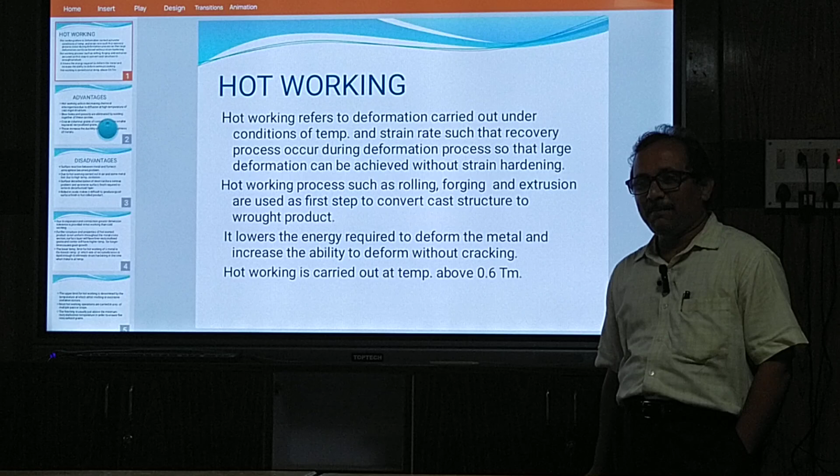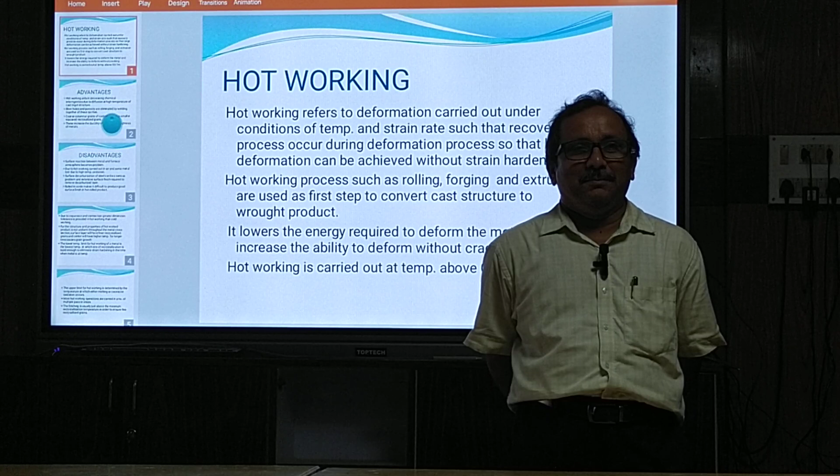Dear students, today we will discuss about your mechanical working subjects. The topic is your hot working and cold working. There are two types of working.

Mechanical working is carried out for different processes. Our mechanical working processes like rolling, forging, extrusion and wire drawing are all classified into two groups. One is hot working, another is cold working. So before going to that, we should know what is hot working and cold working.

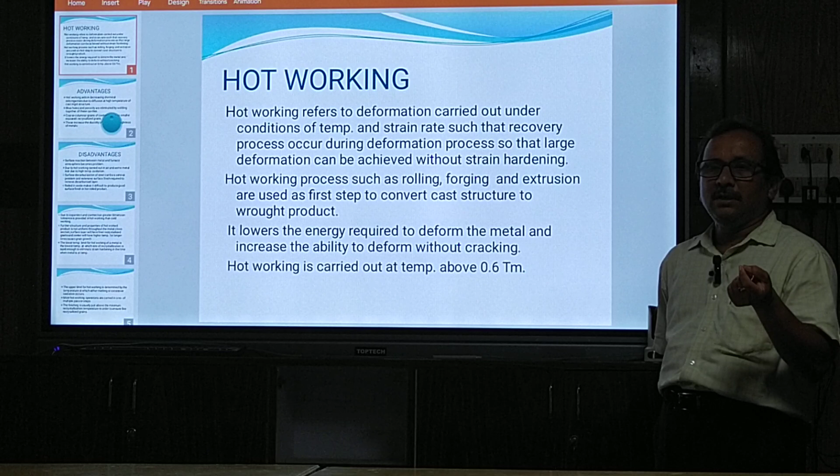There is one temperature that is called recrystallization temperature. If we do the work above the recrystallization temperature, then it is hot working. If it is below the recrystallization temperature, then it is cold working. So before going to the details, first we will go to hot working.

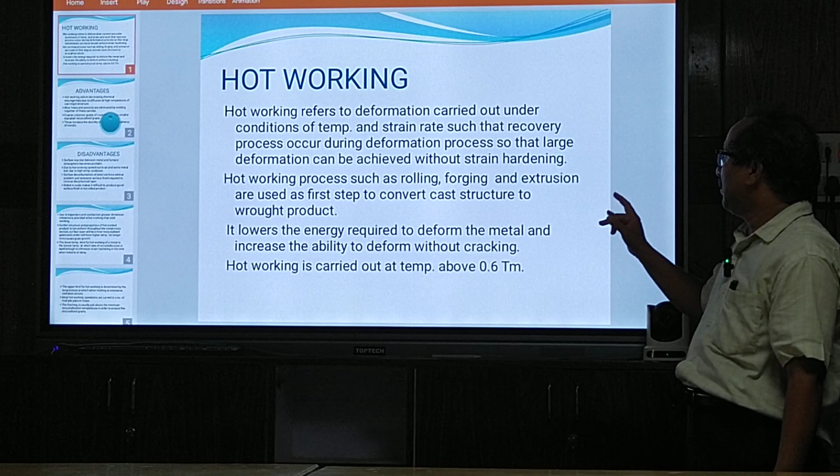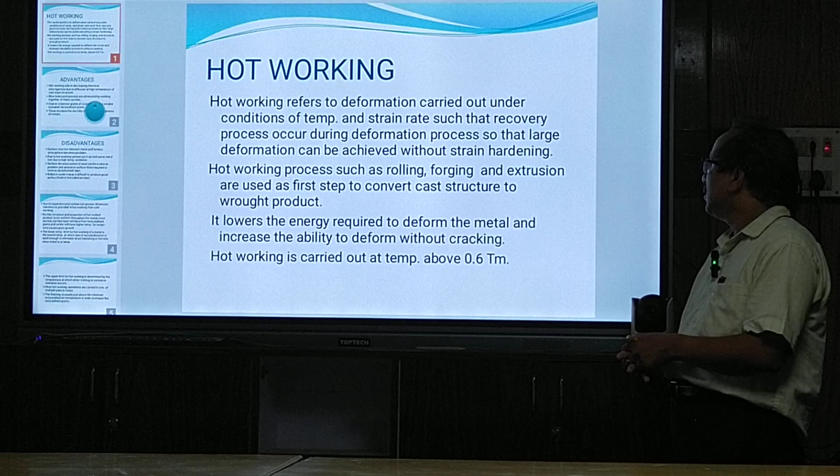Hot working refers to deformation carried out under conditions of temperature and strain rate such that recovery processes occur during the deformation process, so that large deformation can be achieved without strain hardening. During this process, the strain rate and deformation occur such that recovery and recrystallization take place simultaneously, so we can do maximum amount of mechanical working.

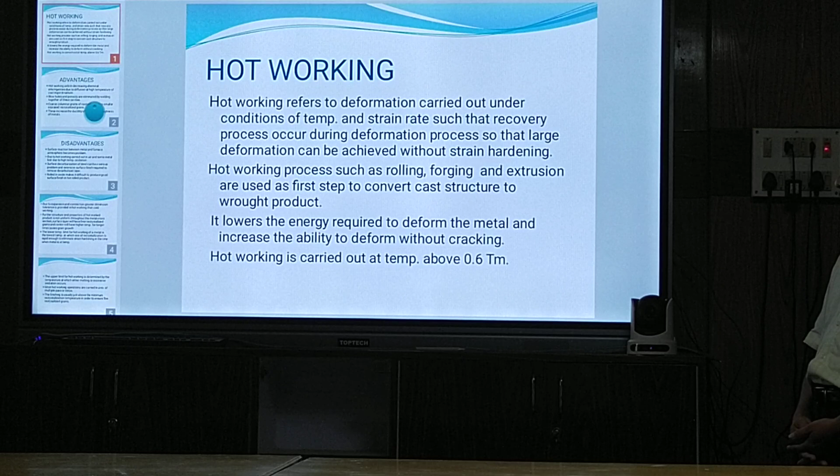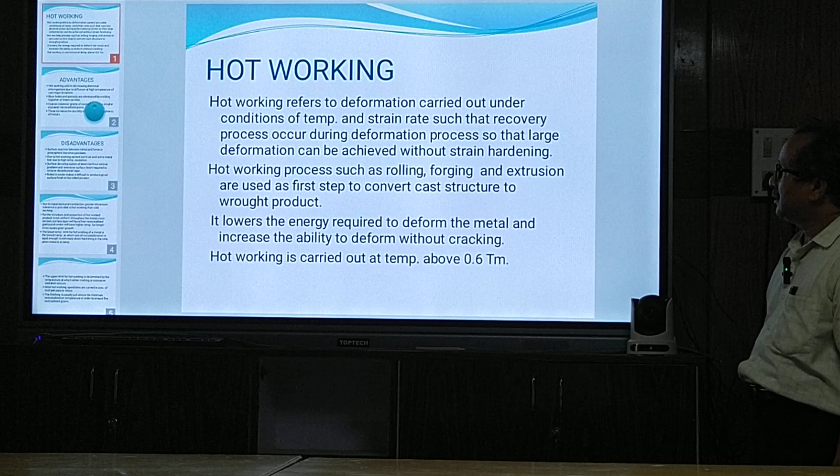Hot working processes such as rolling, forging, extrusion are used as the first step to convert cast structure to wrought product. In hot working, it lowers the energy required to deform the metal and increases the ability to deform without cracking. Hot working is carried out at a temperature above 0.6 of the melting temperature. So this is the definition of hot working.

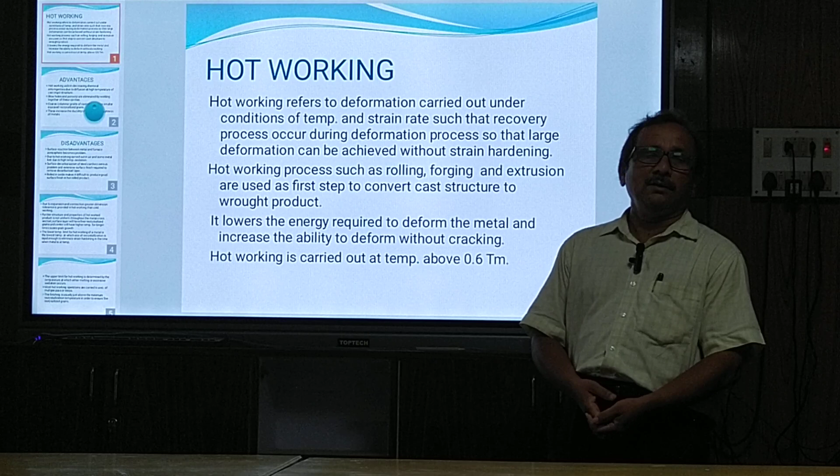If we do the work above the recrystallization temperature, then it is hot working. During this hot working, the deformation and recovery of deformation take place simultaneously, such that much more mechanical working can be carried out simultaneously.

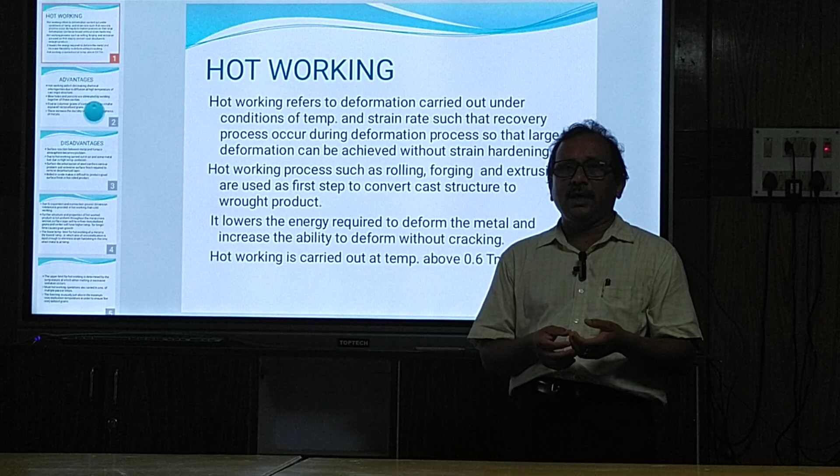Next we will go to the advantages of hot working. There are some advantages of hot working.

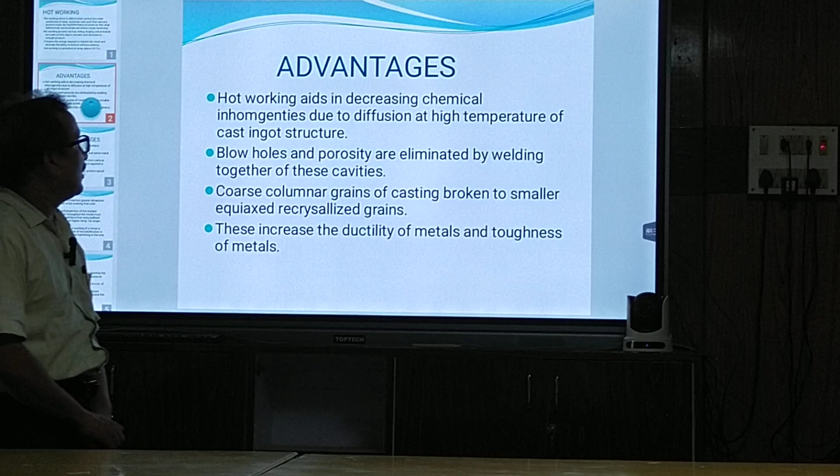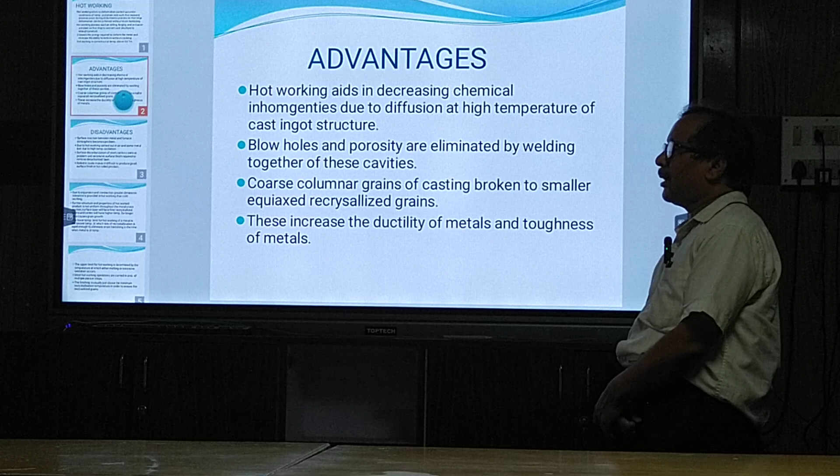First, it decreases the chemical inhomogeneities due to diffusion at higher temperature of cast ingot structures. So it decreases chemical inhomogeneities, meaning the chemical composition gets uniform throughout.

Second, blowholes and porosity are eliminated by welding together of the cavity. During hot working, if there are defects like blowholes and cavities, they get welded up.

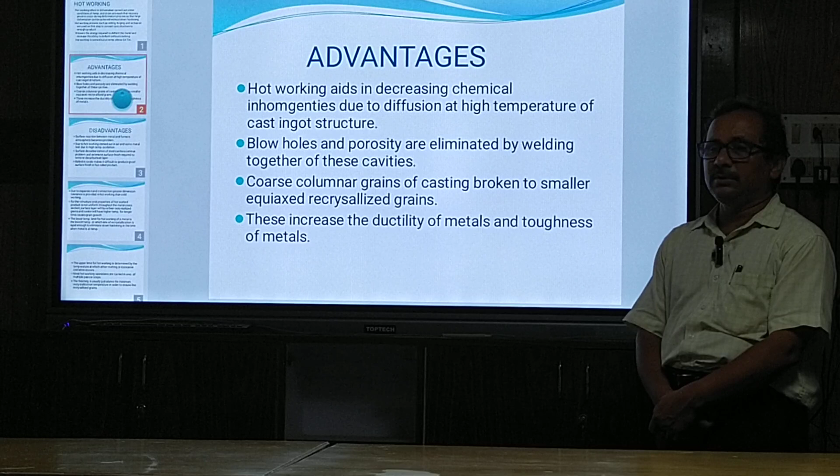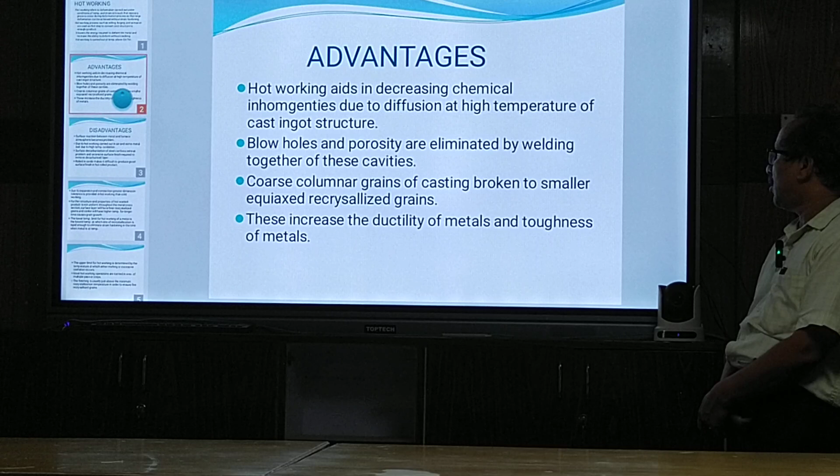Next, coarse columnar grains of casting are broken into smaller recrystallized grains. This increases the ductility and toughness of metals. So these are the advantages of hot working, and due to these advantages, we go for hot working.

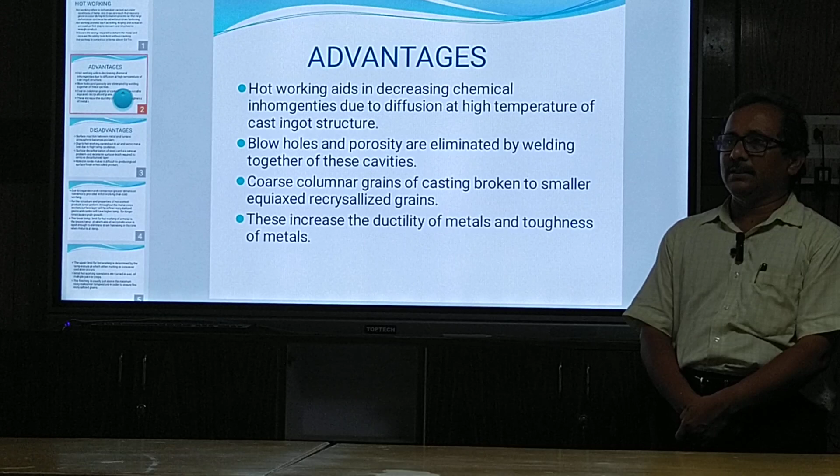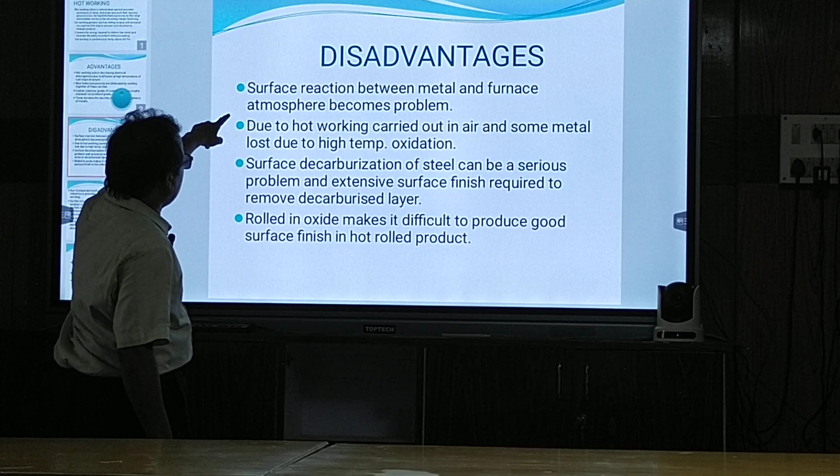Next, we will go to the disadvantages of hot working. Number one is surface reaction between the metal and furnace atmosphere, which becomes a problem.

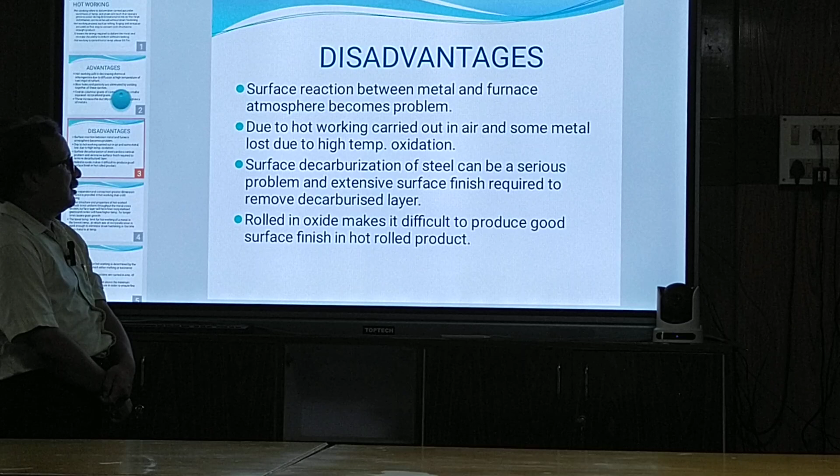Due to hot working being carried out in air, some metal is lost due to high temperature oxidation.

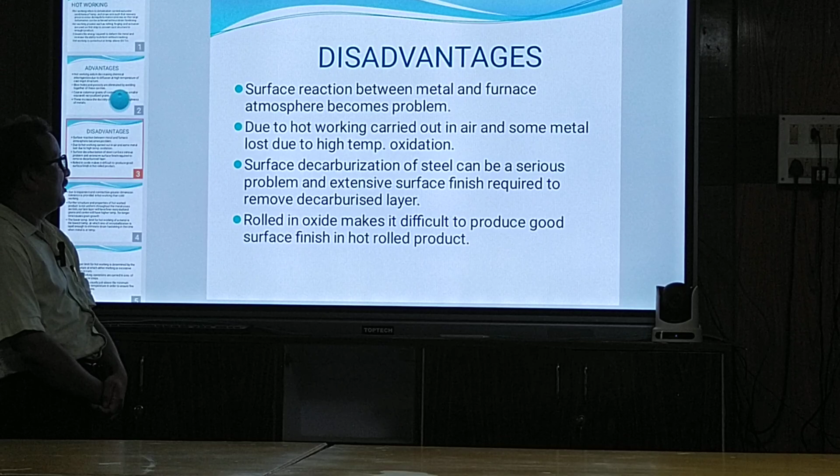Surface decarburization of steel can be a serious problem. Extensive surface finishing is required to remove the decarburised layer. Rolled-in oxide makes it difficult to produce a good surface finish in hot rolled products.

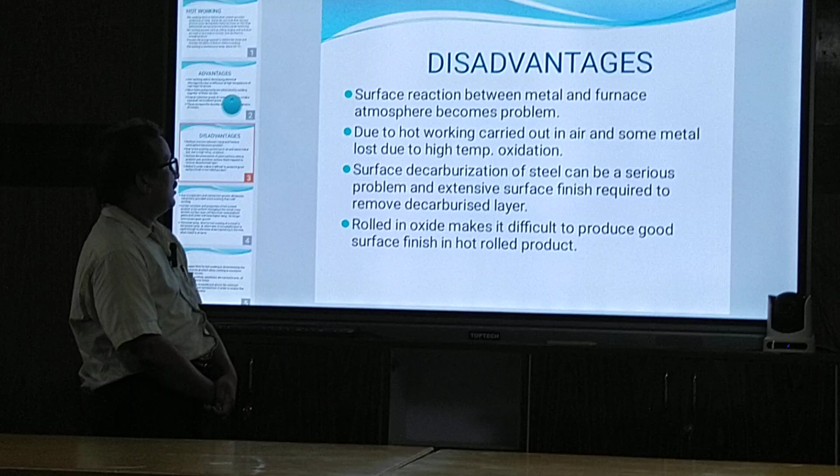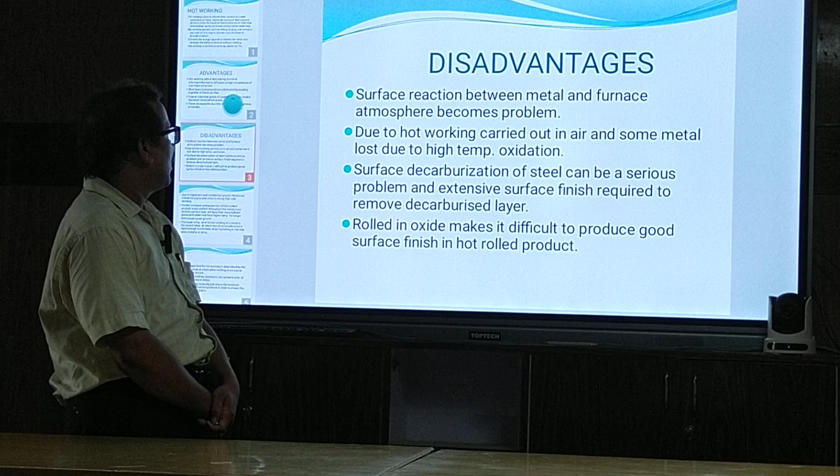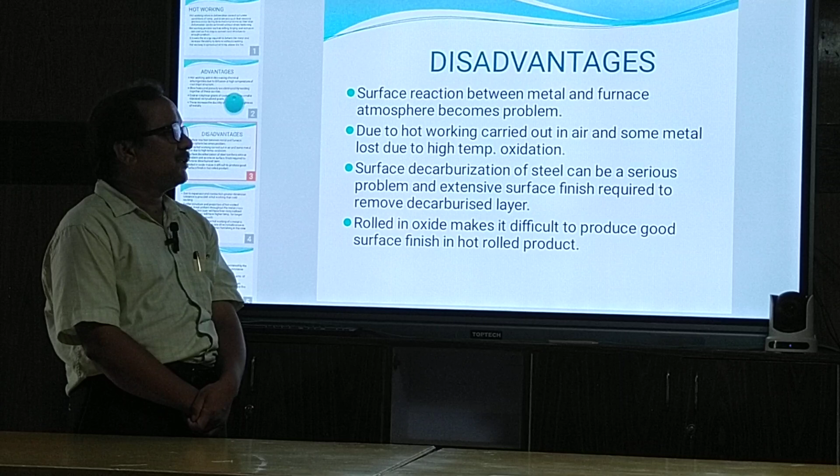So there are some defects that occur in rolling products due to oxidation, and decarburization of the surface layer takes place. These are the disadvantages of hot working.

Next, also due to expansion and contraction, greater dimensional tolerance is required, as we know. Then the structure and properties of the hot worked product are not uniform throughout the metal cross section.

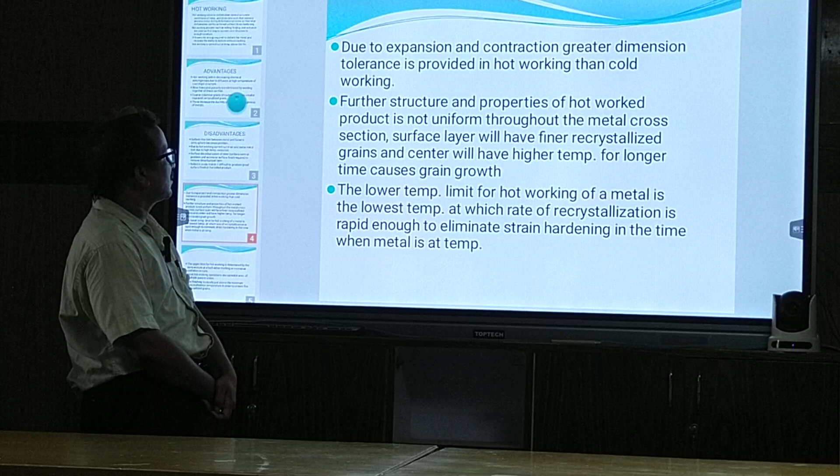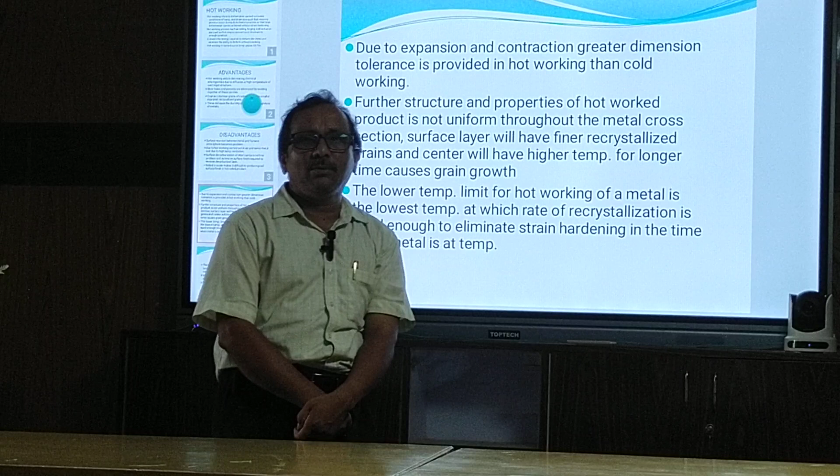The surface layer will have fine recrystallized grains while the center will have higher temperature. In that case, when we do forging or rolling, the surface gets more energy.

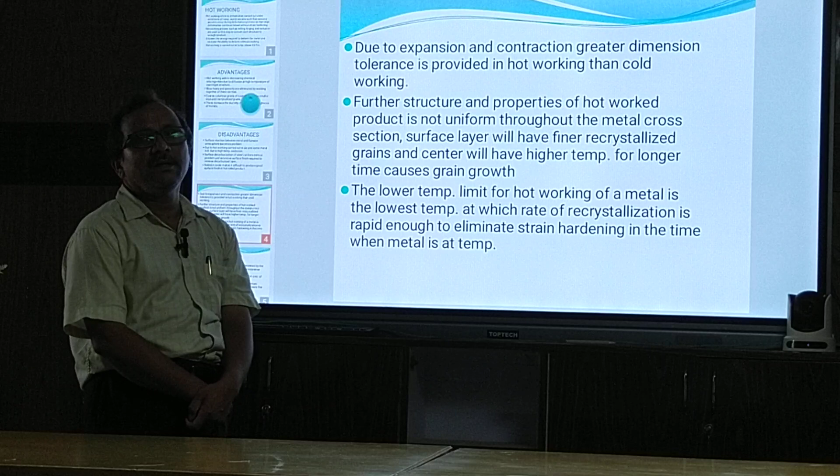For that, the grain refinement takes place at the surface and is less toward the center of the product. So that is the disadvantage we will get. We will not get a uniform grain structure throughout the structure.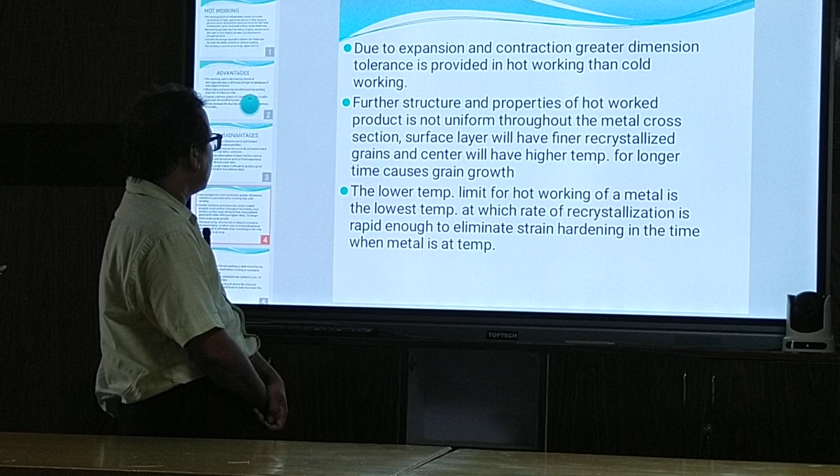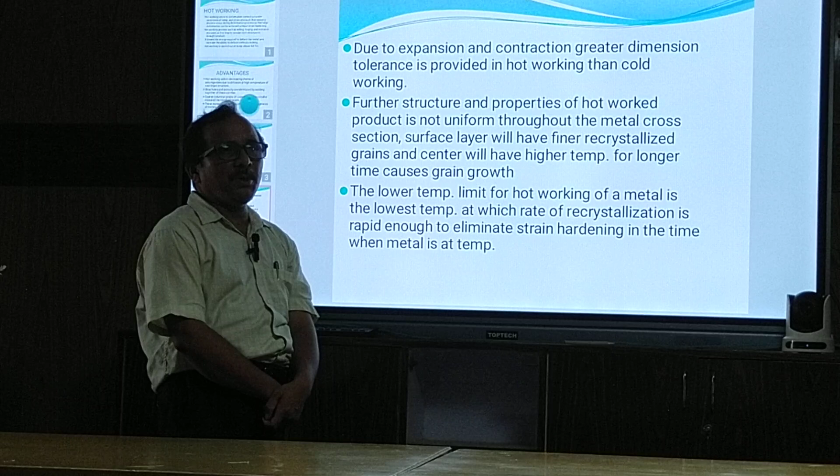The lower temperature limit for hot working of a metal is the lowest temperature at which the rate of recrystallization is rapid enough to eliminate strain hardening in the time the metal is at temperature. So we will select a temperature such that the strain hardening effect in the working should be recovered during the hot working conditions.

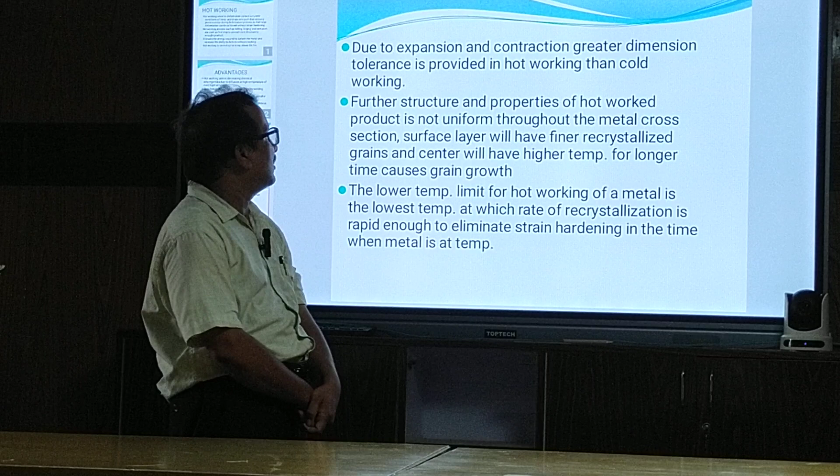So these are the disadvantages. Dimension tolerance is also a disadvantage in case of hot working, because we have to provide more dimension tolerance in case of a hot working product.

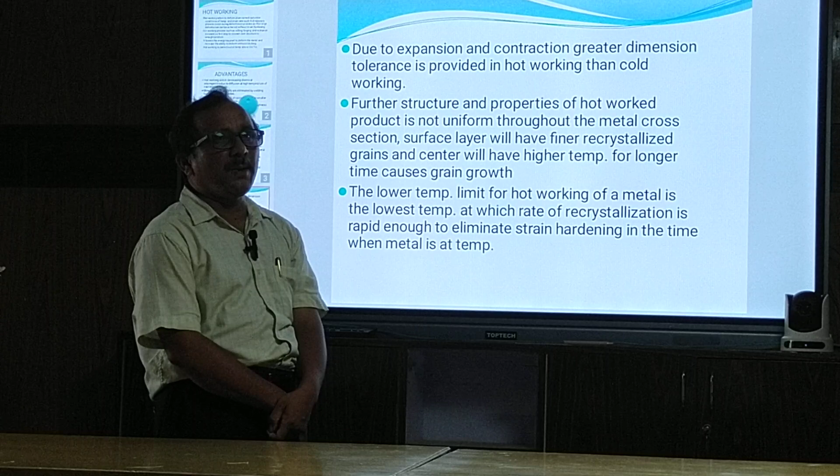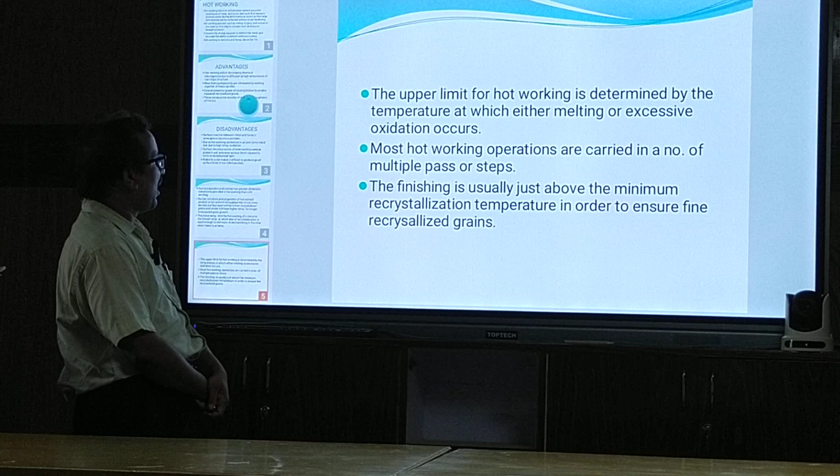There are some other points in hot working: the upper limit for hot working is determined by the temperature at which either melting or excessive oxidation occurs. Most hot working operations are carried out in a number of multiple passes or steps. Finishing usually takes place at the minimum required temperature in order to ensure fine recrystallization. So these are the facts, the disadvantages that take place in hot working.

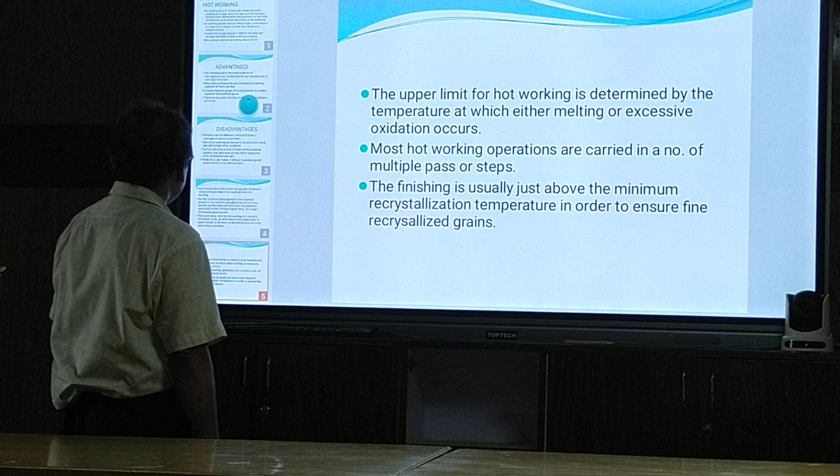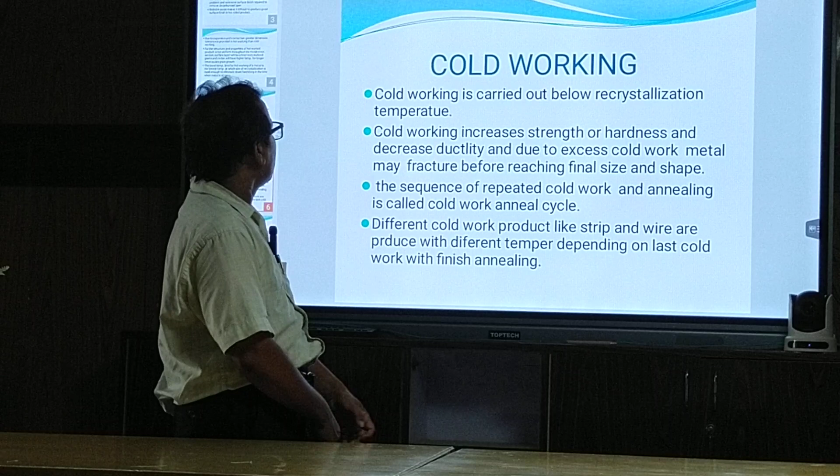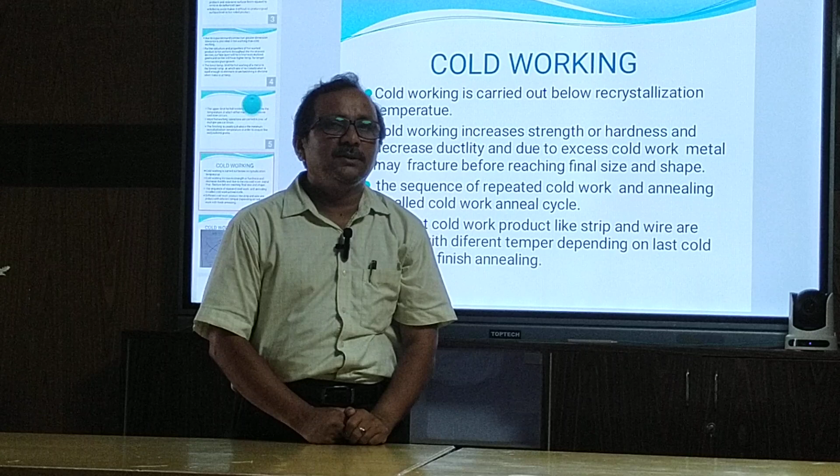Then we will come to cold working. Cold working, we know, is carried out below the recrystallization temperature. Recrystallization temperature means the temperature at which the complete metal is recrystallized - recrystallization takes place and new strain-free grains form. So that is the temperature called recrystallization temperature.

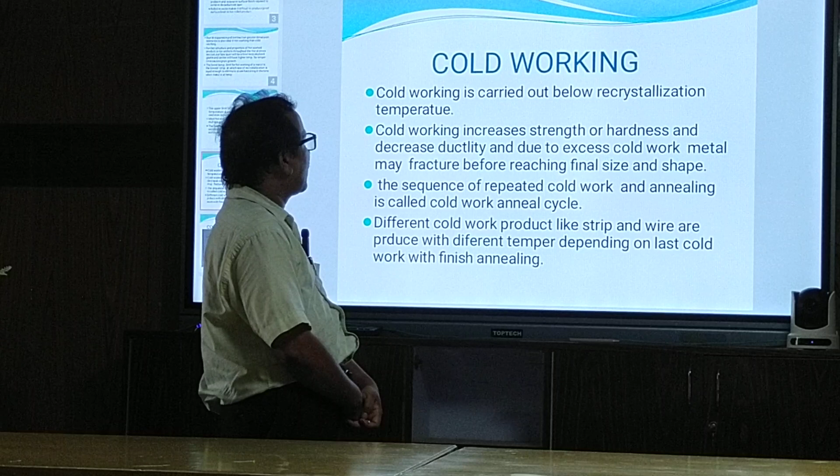So then we will come to cold working. Below this recrystallization temperature we are conducting cold working. So cold working increases strength - this is the important point - cold working increases strength and hardness.

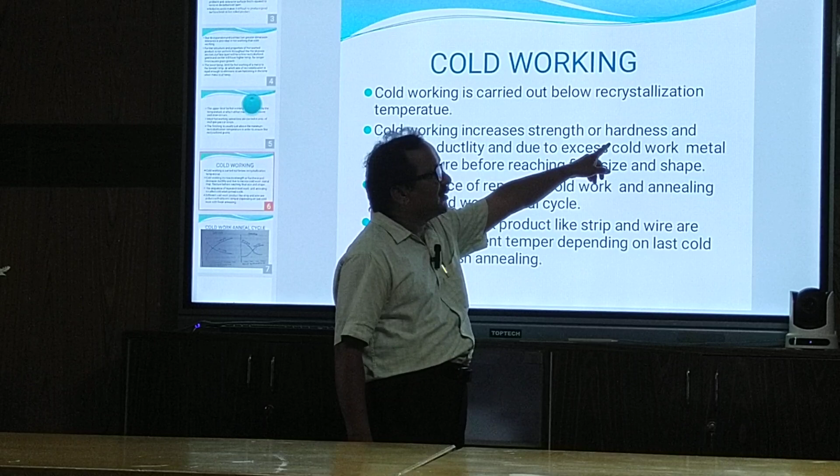Due to cold working, strength and hardness is increased, but in case of hot working, that is balanced by the recovery, recrystallization and annealing phenomena. So, regarding cold work, the sequence of repeated cold work and annealing is called cold work anneal cycles.

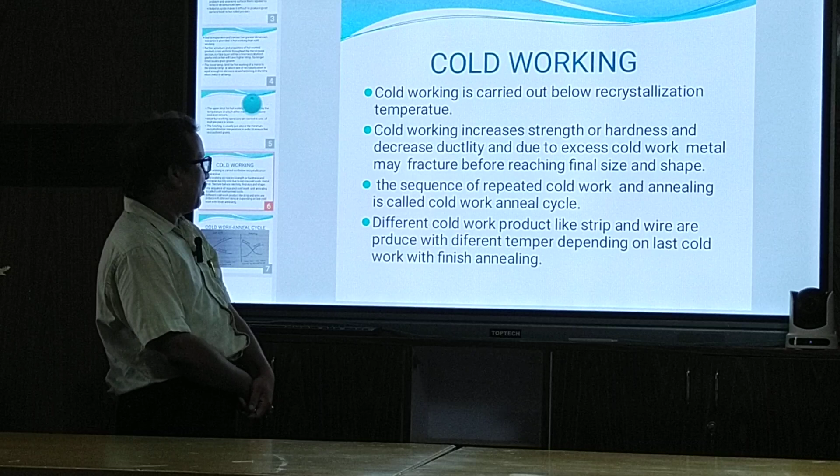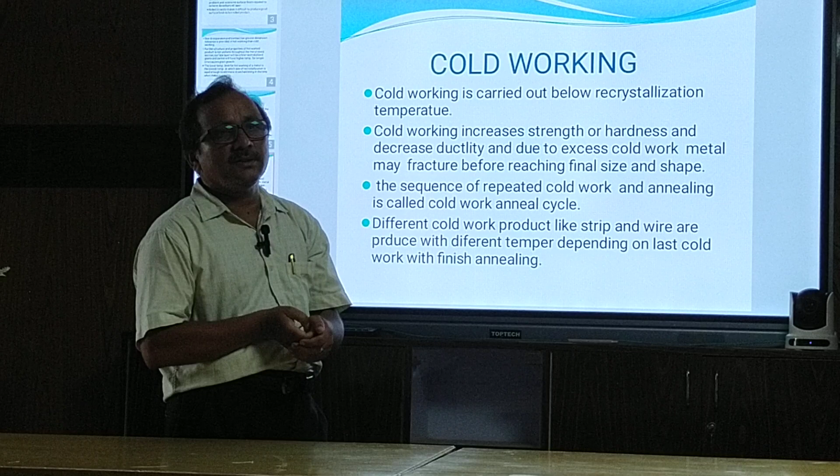Different cold worked products like strip and wire are produced with different temper depending on the last cold work with the same finish annealing. So basically cold working is carried out below the recrystallization temperature and it increases the hardness and strength. This is the main important point of cold working.

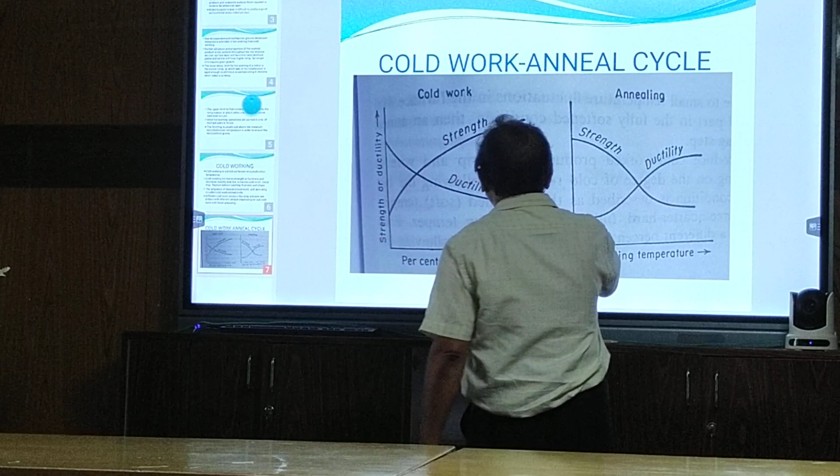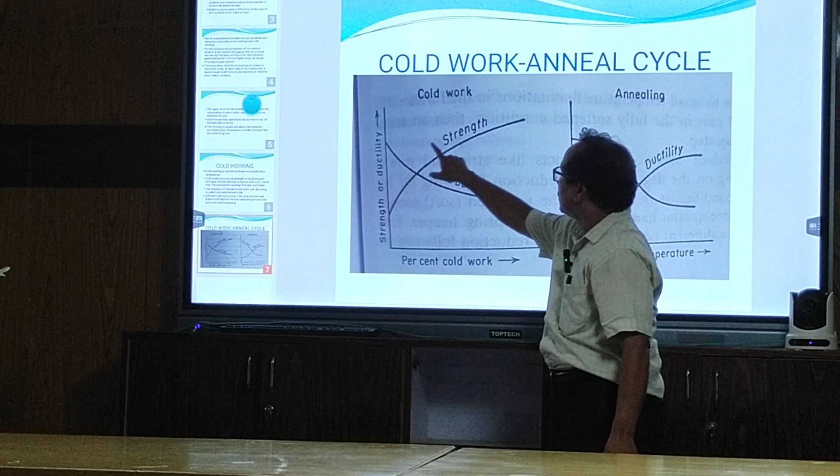So you see the cold work anneal cycles. This cold work anneal cycle means - in the cold work, actually strength is increased, ductility is decreased. This is percent of cold work versus strength or ductility - these are the properties. During cold working, strength is increased, ductility is decreased.

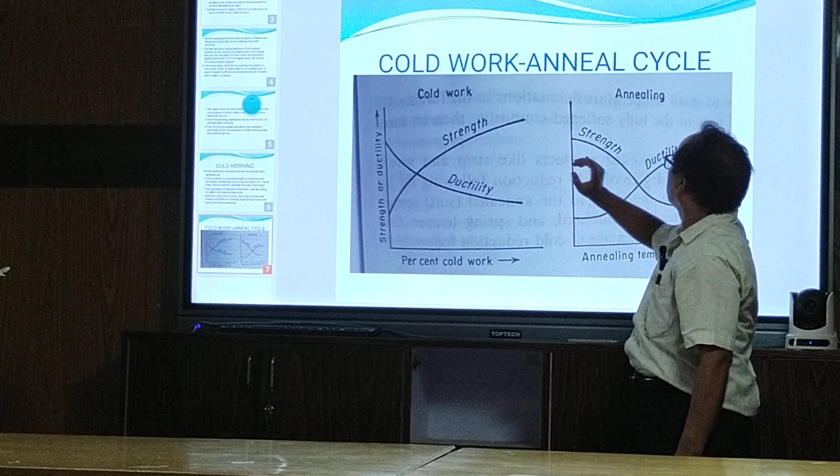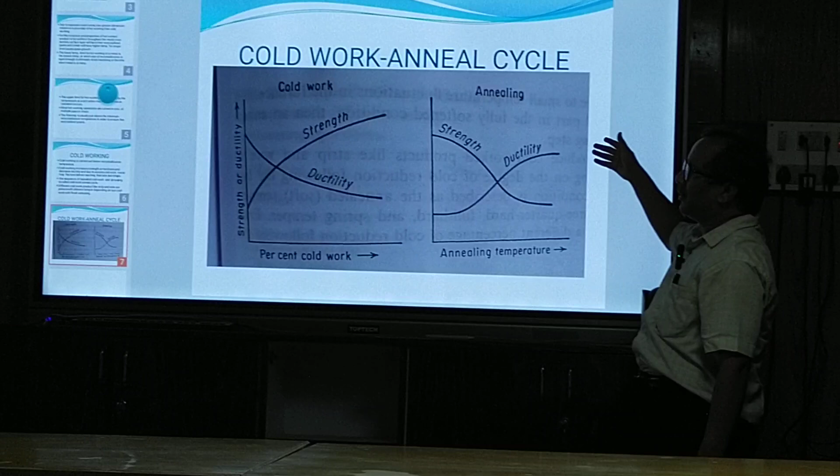Again we will go for annealing - this strength goes down and ductility increases again. Then we go for cold work, and repeatedly we can do this. In case of hot working, both are combined, meaning there is no separate strength and ductility change - recrystallization takes place, so ductility is regained and strength goes down. So these two phenomena take place in hot working.

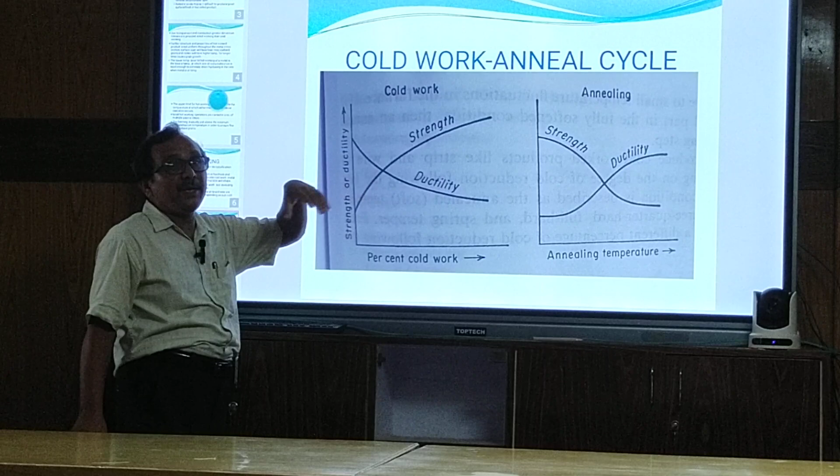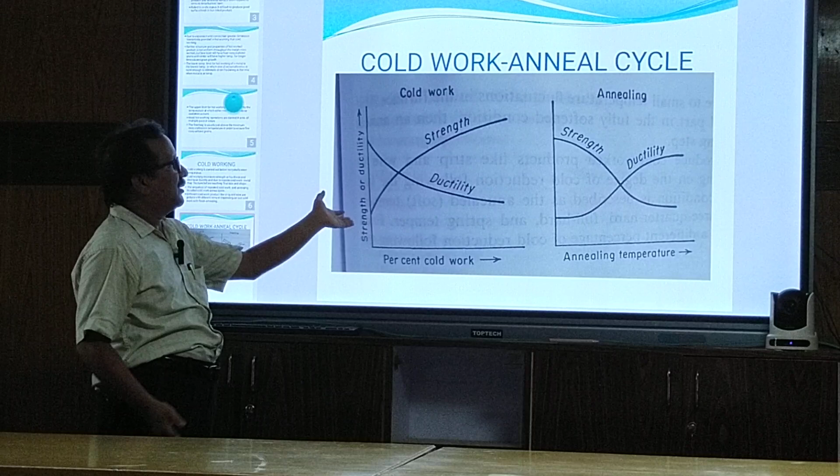You understand? In cold work, strength is increased, ductility is decreased. To again improve ductility, we go for annealing. In annealing, ductility is increased, strength is decreased. Then we go for cold work again. This is called cold work anneal cycles.

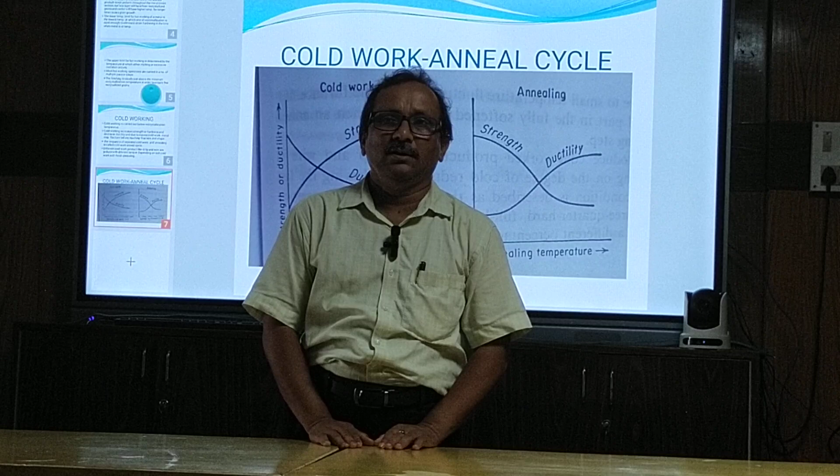So this is all about hot working and cold working. These two processes are carried out differently - for example hot forging, cold forging, hot rolling, cold rolling, and hot extrusion, cold extrusion - all these processes are carried out accordingly. So this is all about the topic. Okay.